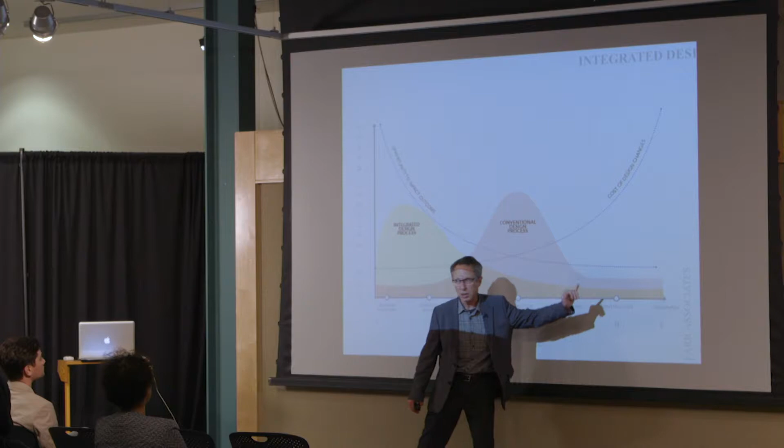I don't think it actually originated with them, but it's a really nice graphic because in the beginning, and this is a timeline on the bottom, so from the programming stage all the way through design and construction and even occupancy, in the beginning we're really just drawing pictures, we're really just talking. So we can make big, bold design changes relatively easily, and we have the opportunity to have a great impact on the outcome of the project at that very early stage, and design changes really cost nothing.

But as we move further and further across that timeline, our ability to change the outcome diminishes, we're really just sort of tweaking around the edges, and it's very expensive to make design changes at that point.

So it's important in the beginning to get all the disciplines involved. It's important to have the owner involved. It's important to have the owner's facilities staff involved, because they're the ones that are going to be operating these facilities and managing the landscapes, and even the users and employees, in this process, so that we can understand their needs. So really pushing that upfront process, and that's something a lot of others have talked about as well. So back to the why.

Regulations are something, again, that we're working with all the time. Back before the crash of 2008 - probably many of you are too young to remember that - but back in the day when I started working, we had large developments, and they'd have big pipes leading to big ponds that held the stormwater and prevented flooding. And now, post-crash, it's all about infill and redevelopment kinds of projects on much smaller sites, yet we still have to meet all of these same kinds of regulations.

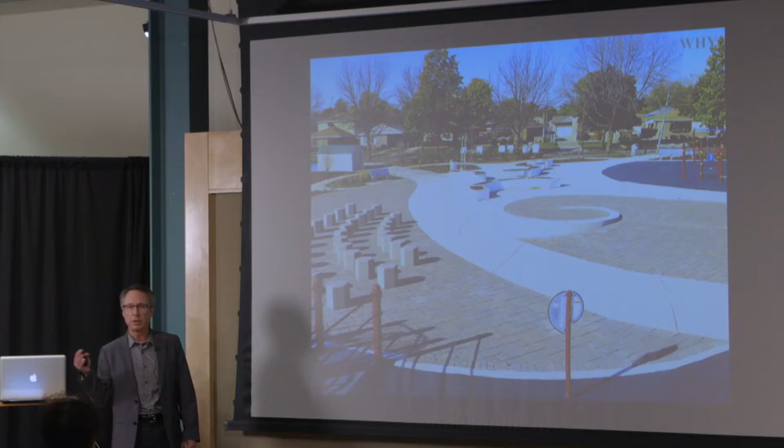So they have a mandate and money they need to spend to reduce flooding, but neither agency really has any land. So we put the organization that has land, Chicago Public Schools, but not a lot of money, together with the two agencies that need to spend money but don't have land, and we can build these wonderful playgrounds that hold water. All of the paving is permeable paver systems, the water moves through them, the playgrounds are permeable surfaces, the turf areas are permeable surfaces, and all the water gets held underneath and can infiltrate into the ground or be slowly released to the sewer system to reduce that load.

This site is Grissom Elementary School, and there's no discharge off of this site up to about a 2-year event. So very highly functioning from a water management perspective, yet it provides great playgrounds for the kids.

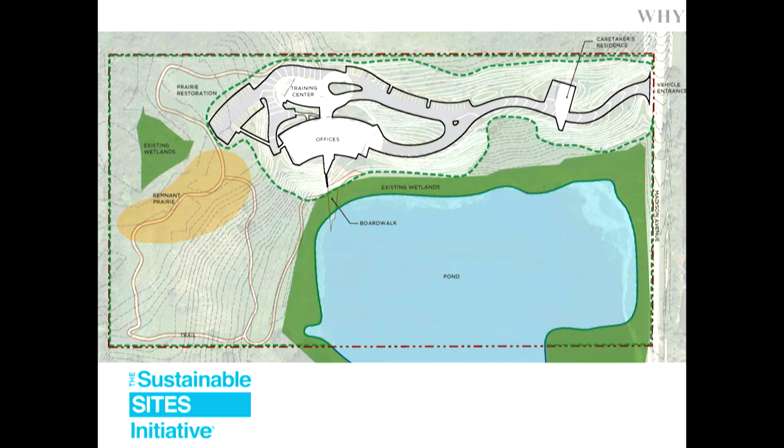The LEED rating system, I can't overemphasize the importance of this in terms of motivating many clients to want higher levels of performance of their systems. LEED, in many ways, focused a lot on buildings. We as site people, landscape architects, civil engineers, we're about the site, so the Sustainable Sites Initiative has been a great addition to the process, providing another rating system that is more focused on the site.

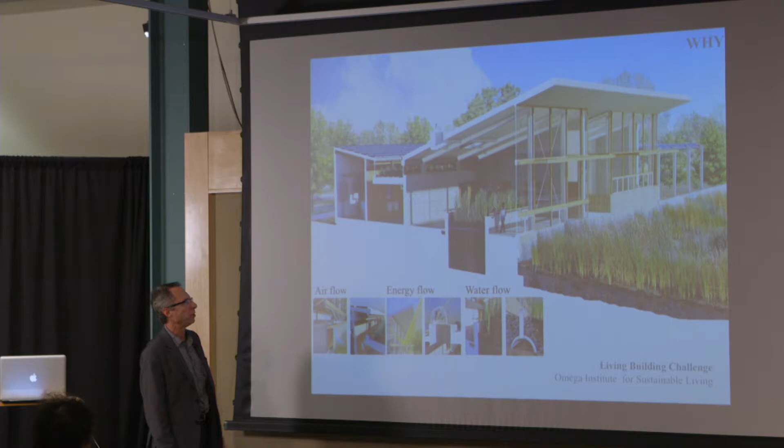And then certainly the Living Building Challenge. In most cases, if the client hasn't already drunk the Kool-Aid, they're probably not going after Living Building Challenge, but still it's important. We have clients that want to be transformative, but they don't always know what that actually means and how to get there. So it's still really important to have that collaborative process and keep them engaged so they understand the implications of that high level of performance in terms of how they're going to manage their site, their buildings, et cetera.

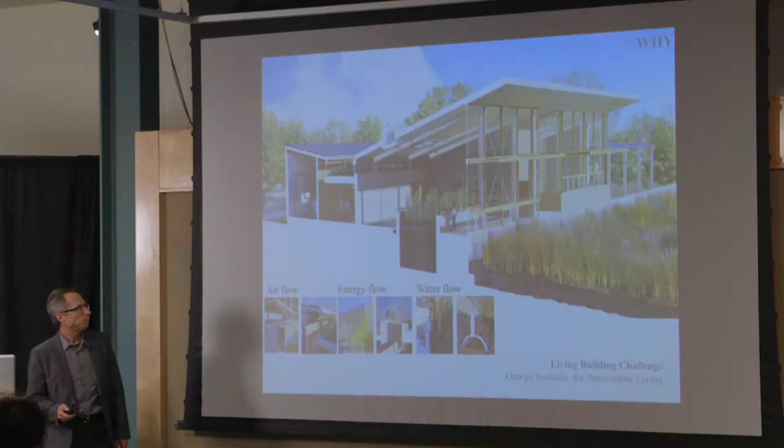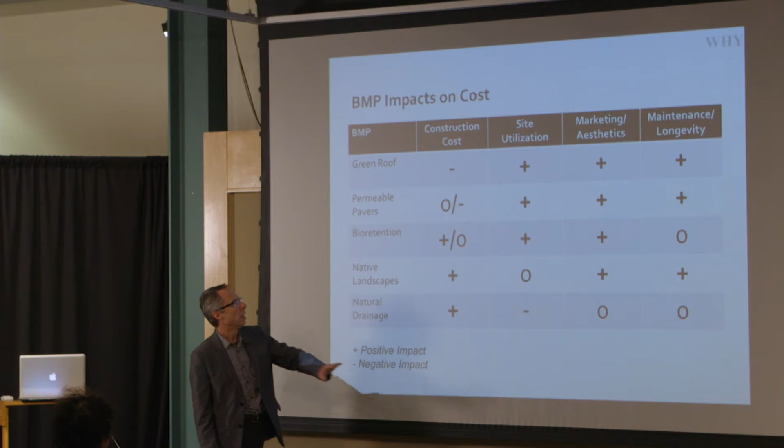A lot of clients will be hyper-focused on that upfront construction cost, and so what we try to talk to them about is the life cycle cost, the reduced maintenance, the longevity of some of these systems, and so those first and last columns.

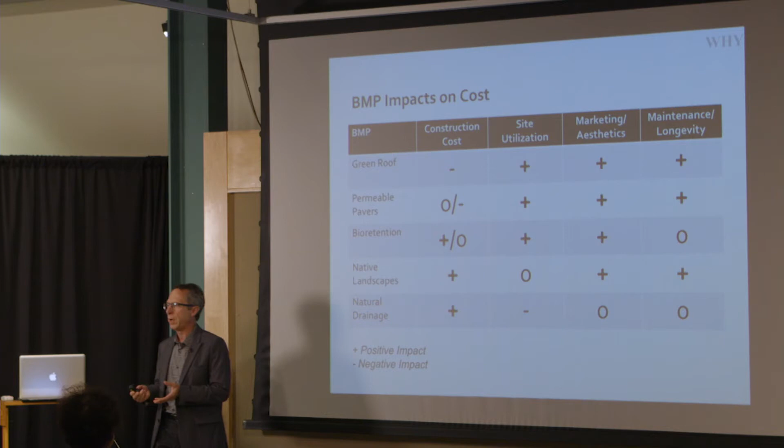But the other part that is really important is this site utilization piece. As we're looking at more urban development and redevelopment, if you can't fit your program on the site, you're buying a larger property or putting less program on the site. By using these ecologically based systems that are better for the environment but also more space efficient, it makes sense from an economic perspective.

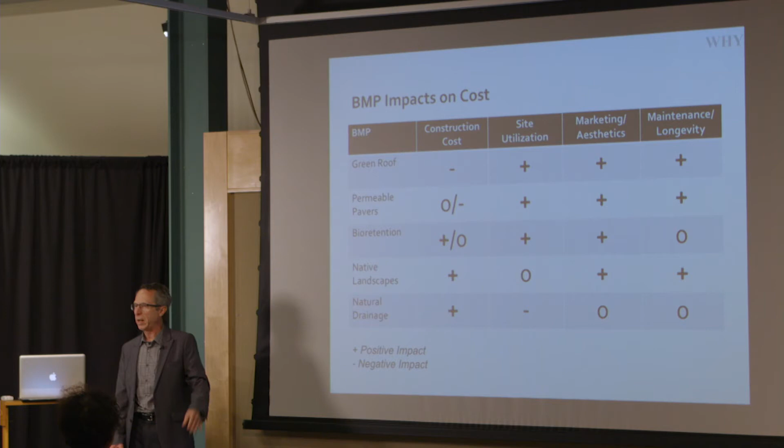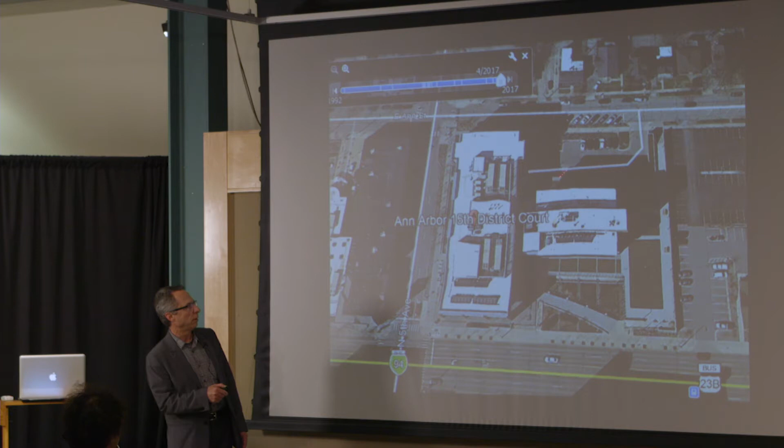All of the surfaces here have green roof systems, all of both the vehicular and pedestrian paving is permeable paving, and all of the landscapes are water-absorbing landscapes.

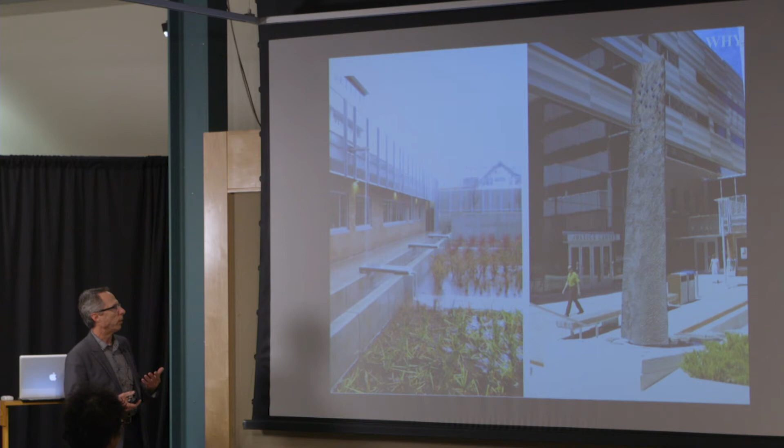Just a couple of photos of that. Again, all of the pedestrian and vehicular paving is permeable, and all of the landscapes are bioretention areas. The city of Ann Arbor even has a percent for art program, meaning every project in the city, whether private or public, has to spend a certain amount on bringing art into these projects.

So, melding those budgets together, we looked at how we manage the rainwater on the site in a very artful way, so that we could engage some of that art budget into the designs of our functional systems on the project.

Then thinking about human productivity and efficiency, making nicer places for people — biophilia. There are all kinds of studies that show, if you look at the costs, you spend a lot of money on the building and the site, but for most businesses their number one cost is staff. So the more productive your staff is, the higher the retention rates and the lower sick leave, you can directly affect the bottom line through design.

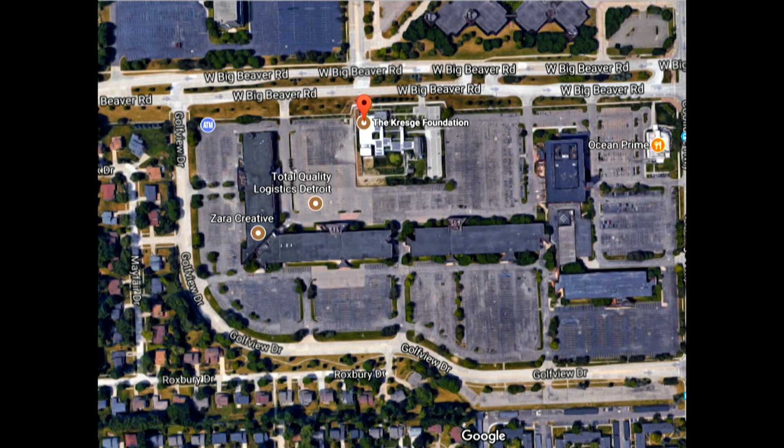Kresge Foundation was a perfect example of that, located in Troy, Michigan. This was the historic farmhouse for the Kresge family, but over the years it had been surrounded by an extremely large office park and asphalt parking lots. They had employees working there, but it was hard to retain them — a lot of it had to do with the surroundings.

So when they expanded the facility, we looked at how, even in this tight space, we could make it a more attractive place, really applying biophilic principles. First was pushing the building down into the site, then constructing native landscapes surrounding the building, putting in naturalized ponds around the conference buildings, and making sure every single office had views to nature despite being completely surrounded by asphalt parking lot and office park.

So with that, I wanted to close with this: we're all getting pretty good at working together as disciplines and collaborating. Now it's really important to start spreading the message to those who aren't already on board, helping to make this more the norm rather than the exception. Thank you.